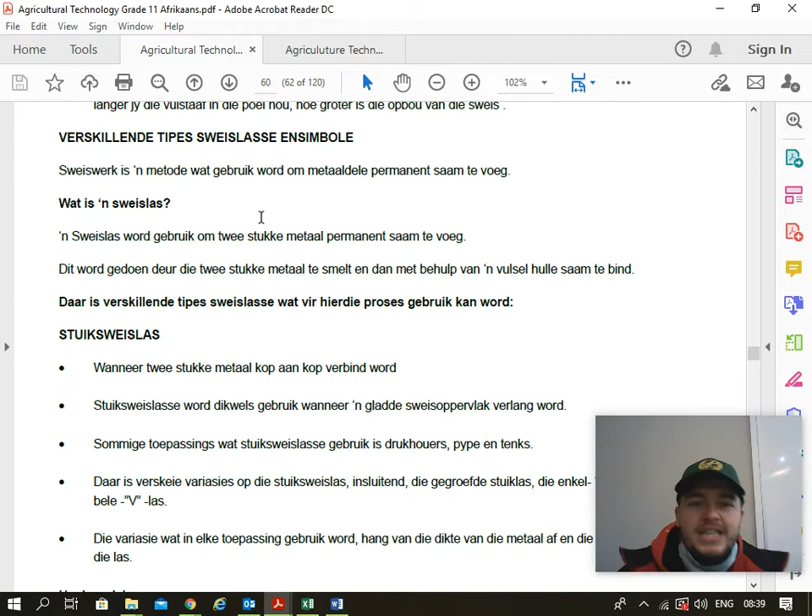You should be able to understand this by now. There are symbols for welding. If you want Pietie to weld a certain type of weld, you don't have to write it on the metal, you just draw the symbol.

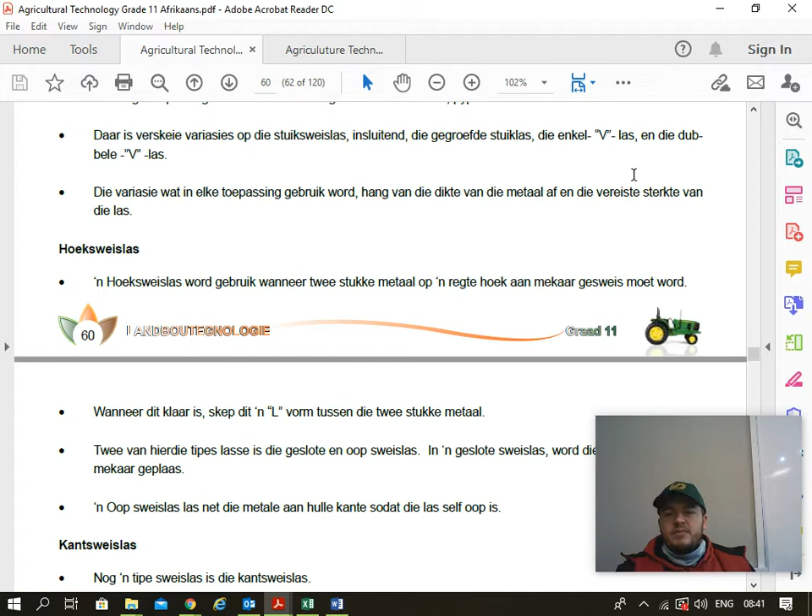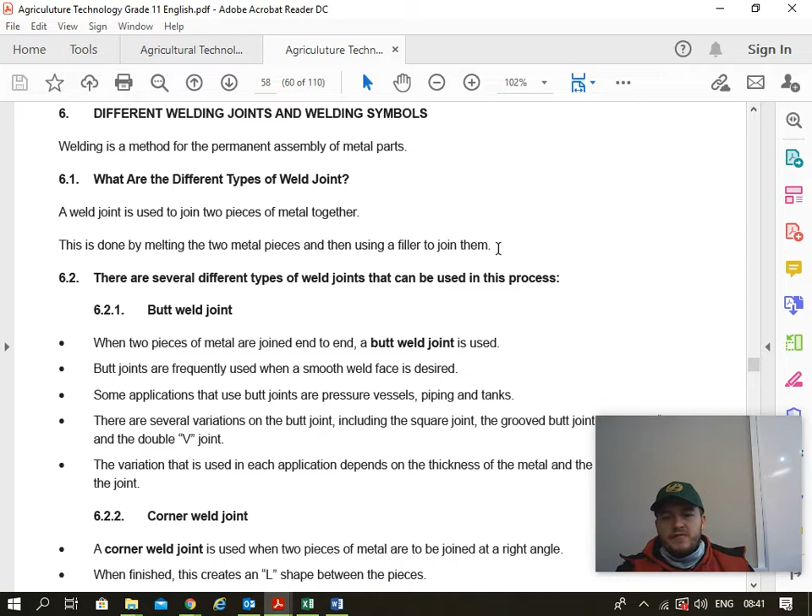Now in English, what are different types of welding joints? A weld joint is used to join 2 pieces of metal together. This is done by melting the 2 metal pieces and then using a filler to join them. There are several different types of welding joints that can be used in this process.

The butt weld joint. Oh yes.

Let's continue. When 2 pieces of metal are joined end to end, the butt weld joint is used. Butt joints are frequently used when a smooth weld face is desired. Some applications that use butt joints are pressure vessels, piping and tanks.

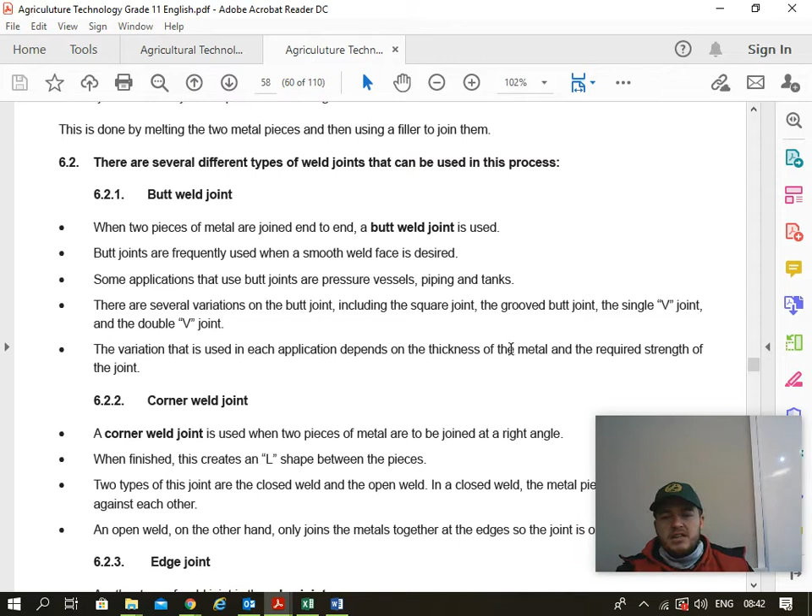There are several variations of the butt joint, including the square joint and the groove butt joint, the single V joint and the double V joint. The variation used in each application depends on the thickness of the metal and the required strength of the joint. The corner weld joint.

A corner weld joint is used when 2 pieces of metal are to be joined at a right angle. The finished creation is an L shape between the pieces. 2 types of this joint are used to weld: the open weld and the closed weld.

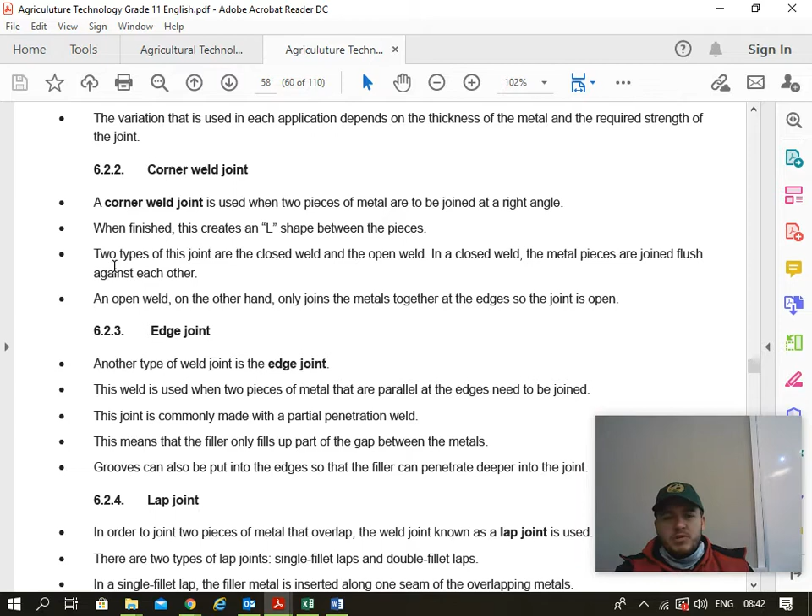In a closed weld, the metal pieces are joined flush with each other. An open weld, on the other hand, only joins the metal together at the edges, so the joint is open.

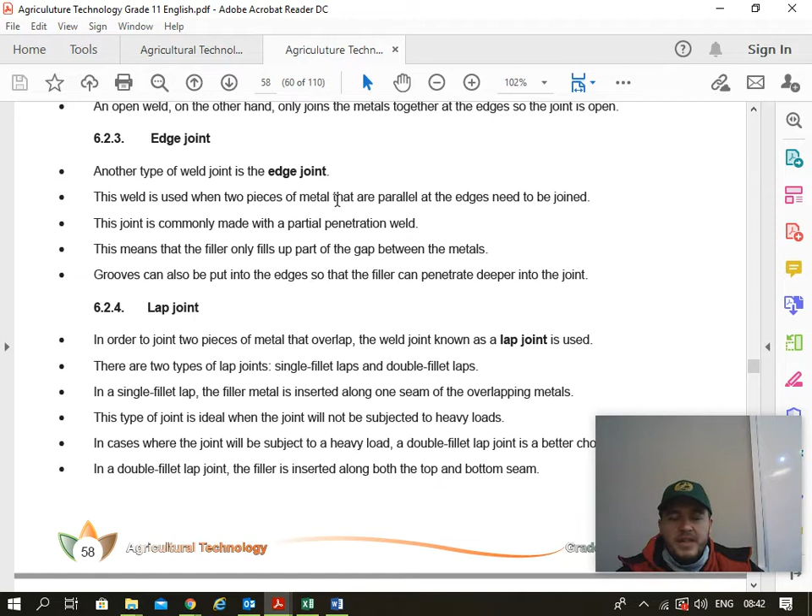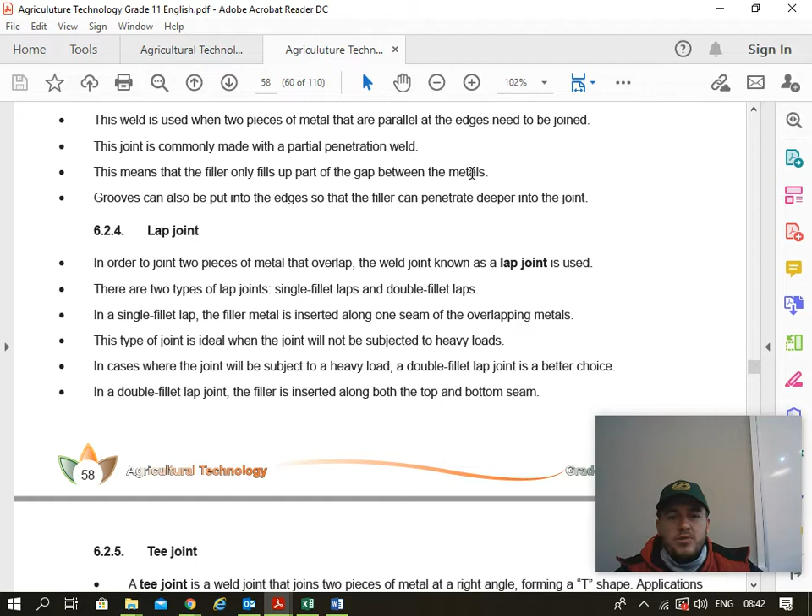And then an edge joint. Another type of weld joint is the edge joint. It is used when 2 pieces of metal that are parallel at the edges need to be joined. This joint is commonly made with a partial penetration weld, meaning the filler only fills up part of the gap between the metals. Grooves can also be put into the edges so that the filler can penetrate deeper into the joint.

Then a lap joint. In order to join 2 pieces of metal and overlap, the weld joint is known as a lap joint. There are 2 types of lap joints: single fillet laps and double fillet laps.

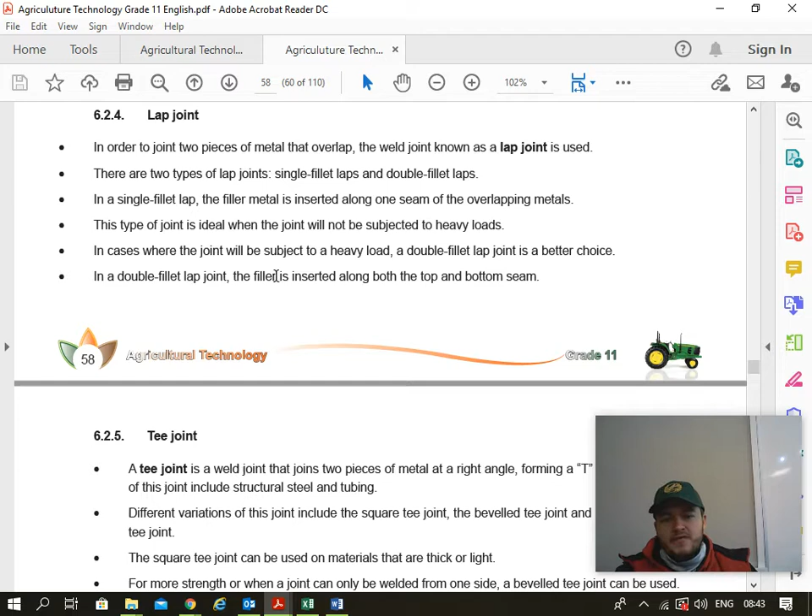In the single fillet lap, the filler metal is inserted along one seam of the overlapping metals. This type of joint is ideal when the joint will not be subjected to heavy loads. In cases where the joint is subjected to heavy loads, a double fillet lap is used. The filler is inserted along both the top and the bottom seam.

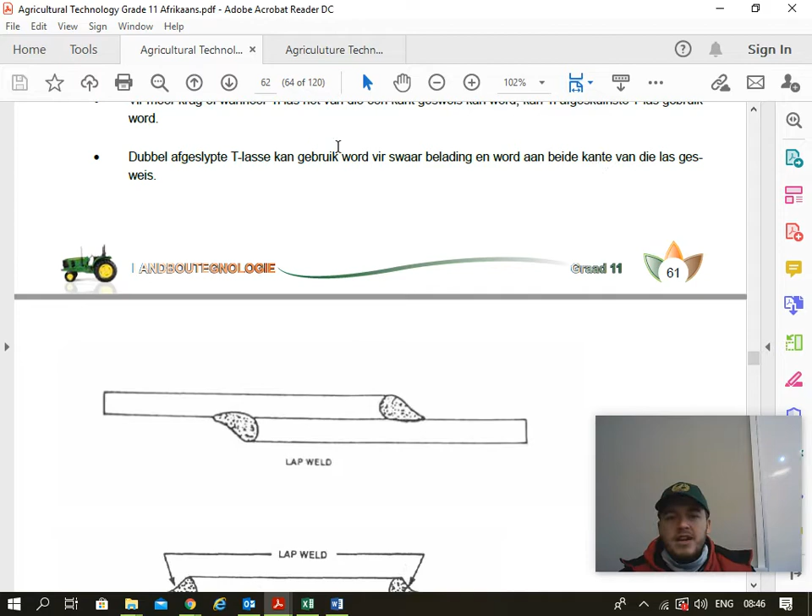For the English, the T-joint, not the T-joint when you go vat jou teen, nee, the T-joint, the letter T, the T-bone. Wen jy T-bone is 'n steel van vleis.

A T-joint is a weld joint that joins two pieces of metal at a right angle, forming a T-shape. Applications for this joint include structural steel and tubing. The different variations of the joint include the square T-joint and the bevel T-joint, and also the double bevel T-joint.

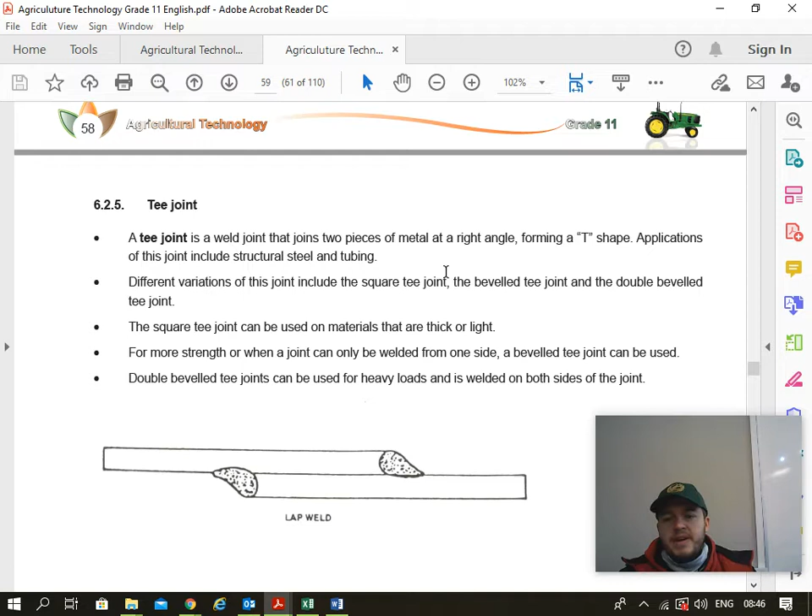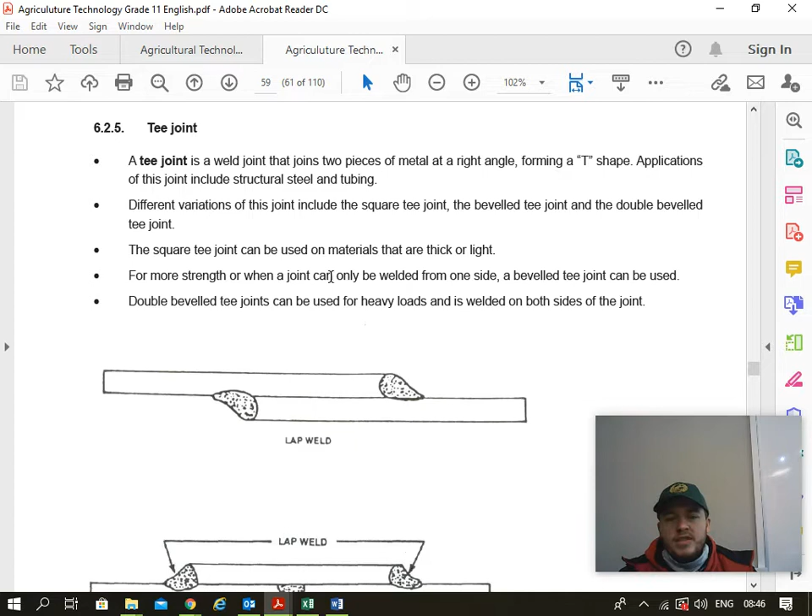The square T-joint can be used on materials that are thick or light. For more strength, or when a joint can only be welded from one side, a bevel T-joint can be used. Double bevel T-joints can be used for heavy loads and are welded both sides of the joint.

Now there's the picture. That is a lap weld. That's what it looks like. Man, that's a lap weld. That's what it gaan lyk. There we have a lap weld with a butt weld.

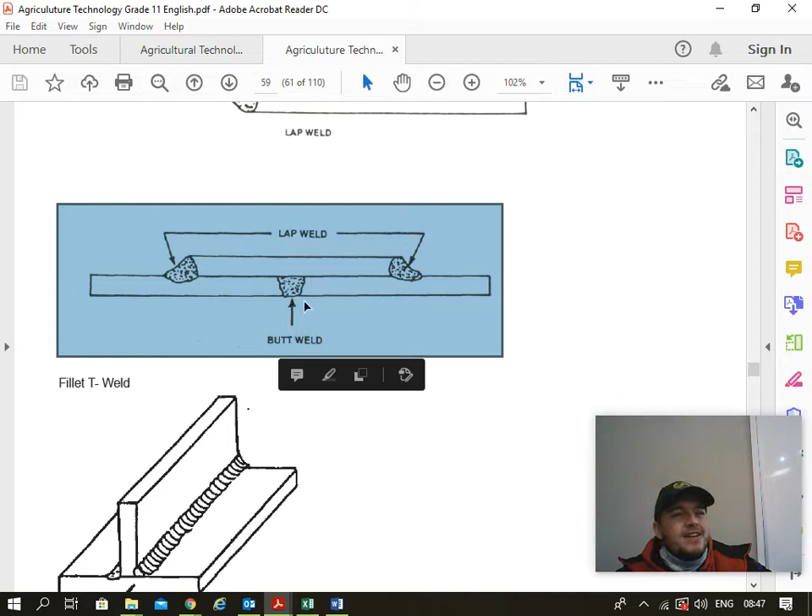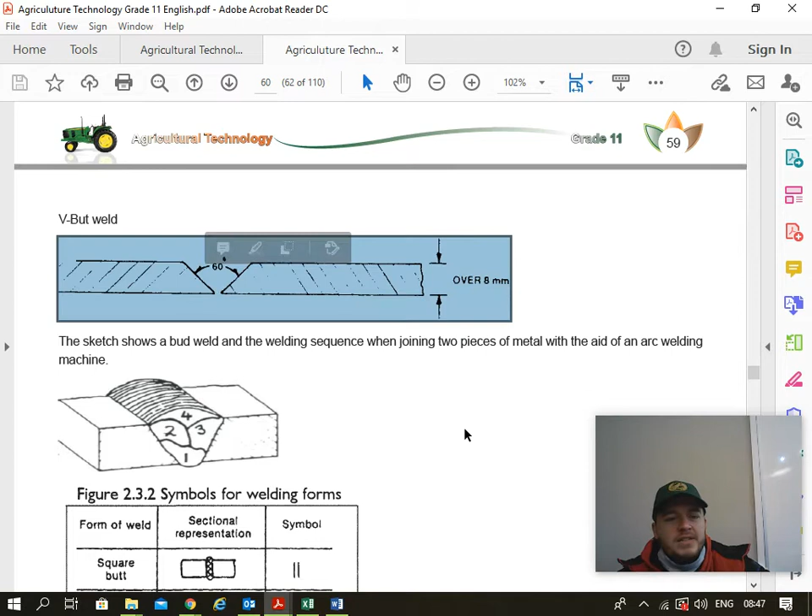That is a fillet T-weld. Daar's 'n T, is 'n fillet met 'n T-weld. En daar is die V-butt weld. Daar is hy. The sketch shows a butt weld with a welding sequence when joining two pieces of metal with the aid of an arc welding machine. So there is basically a butt weld.

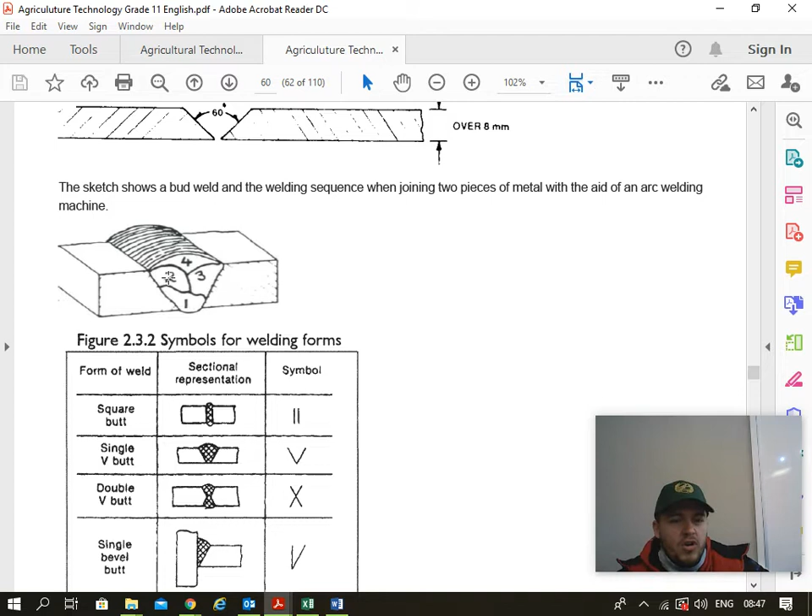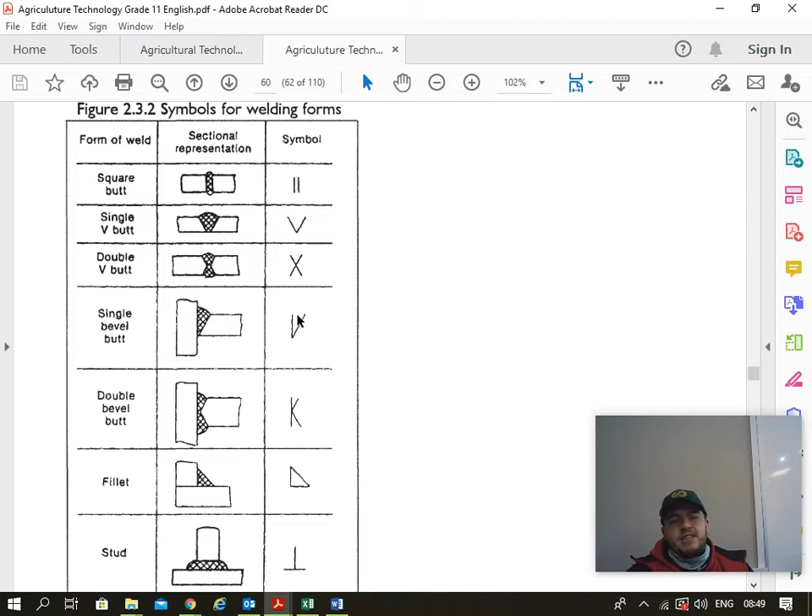We have a square butt, gewone butt joint, a single V butt, a double V, the X basis. A single bevel butt is 'n skewe V. A double bevel butt is 'n K, 'n fillet. Fillet weld, daar loop hy, is 'n driehoekie. 'n Stud, met 'n gewone T, an edge, not the wrestler but the weld. Daar is hy en 'n sealing run.

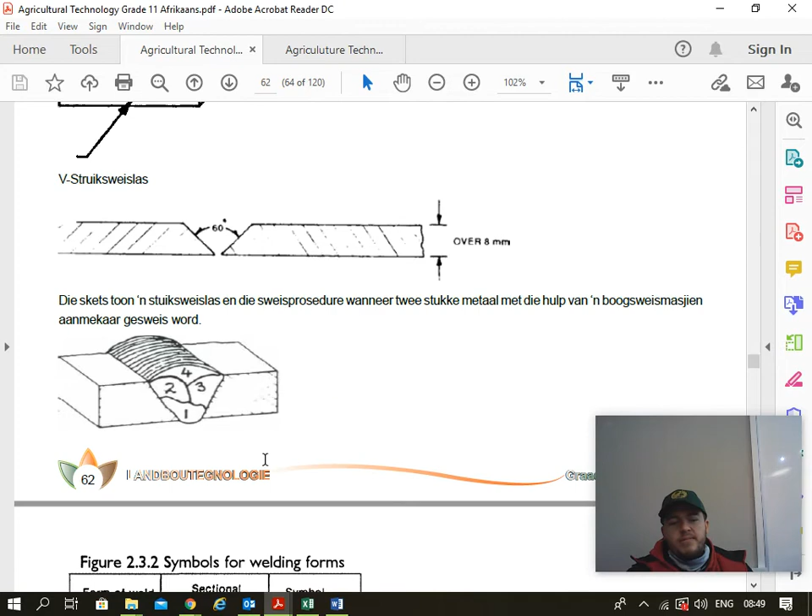En hier is nie. What I also do is I can give you that little picture there. And I can say, right boys, what's its name? What is the symbol and what is the name? Or both.

Oh, just shut up. Ek sien almal kyk nou vir Benje so. I found out today a new term, throwing shade. That's what you were doing to Benje now. You're looking at him now. Hulle gaan jou goed vat. They're gonna take your shoes and your life.

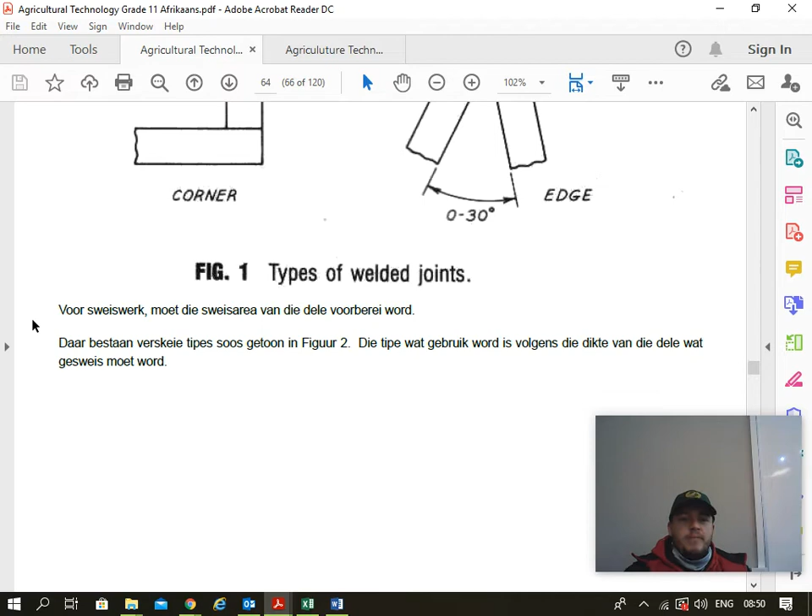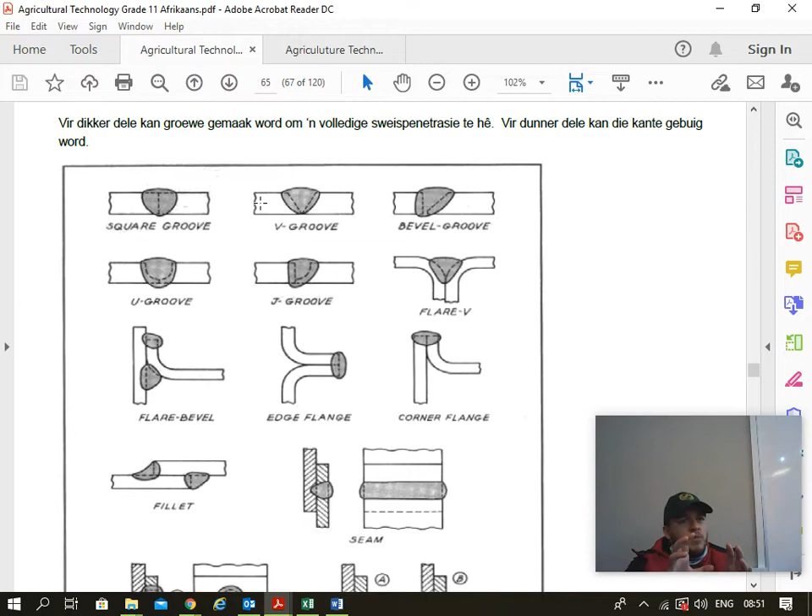So for thicker welds, we can make a groove with a grinder to make it a bit thicker, to get a thicker weld in it, to make it last a bit longer. So ons maak 'n groef om meer weld te kry, om sterker te laat weld.

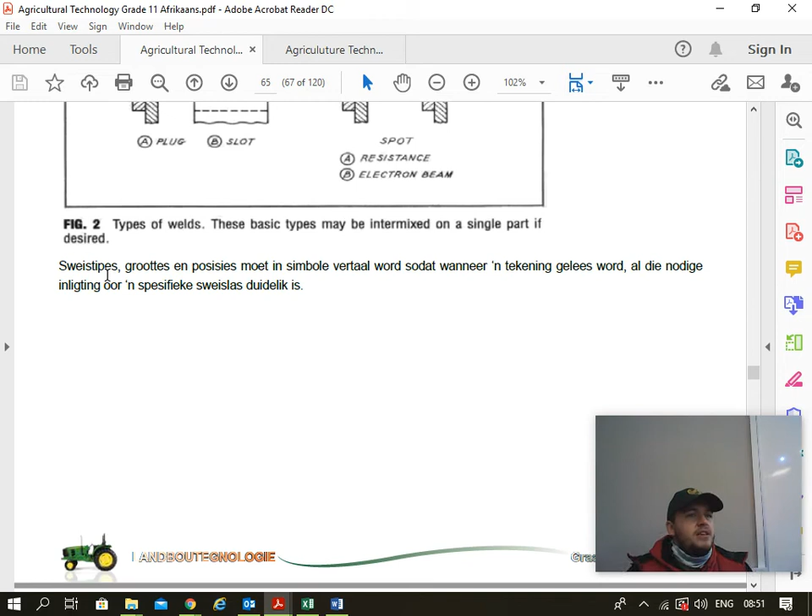So why do we use symbols? When we use drawings, my welders can see on the drawing the symbol that we're going to use. I don't want to write the whole thing on the drawing. Remember, a drawing only has length, measure, and symbols. That's it. There can't be a book.

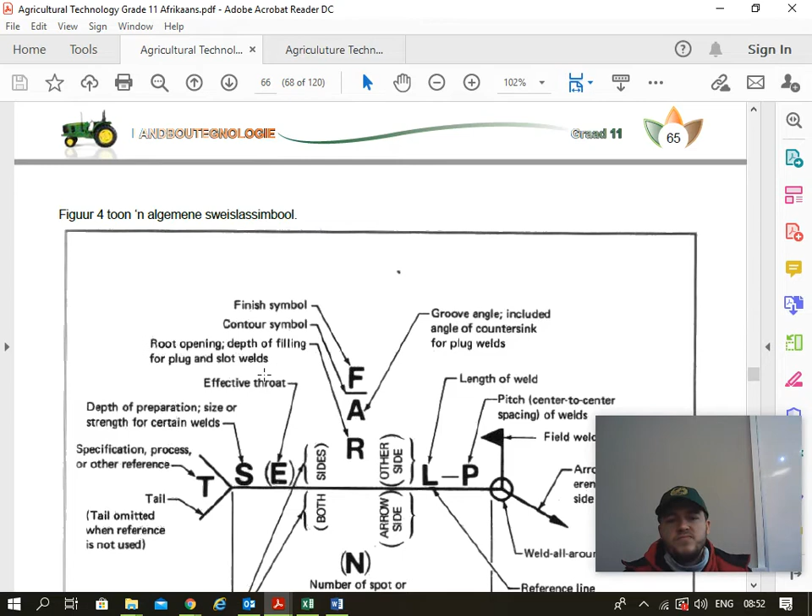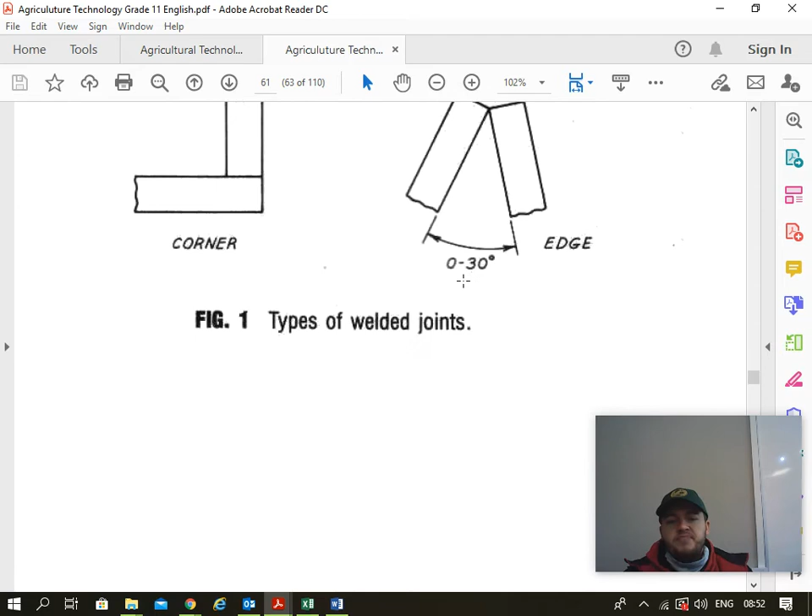Now we're going over to the English guys. Just remember, you can go through that sketch. That's important. And that one you can go through.

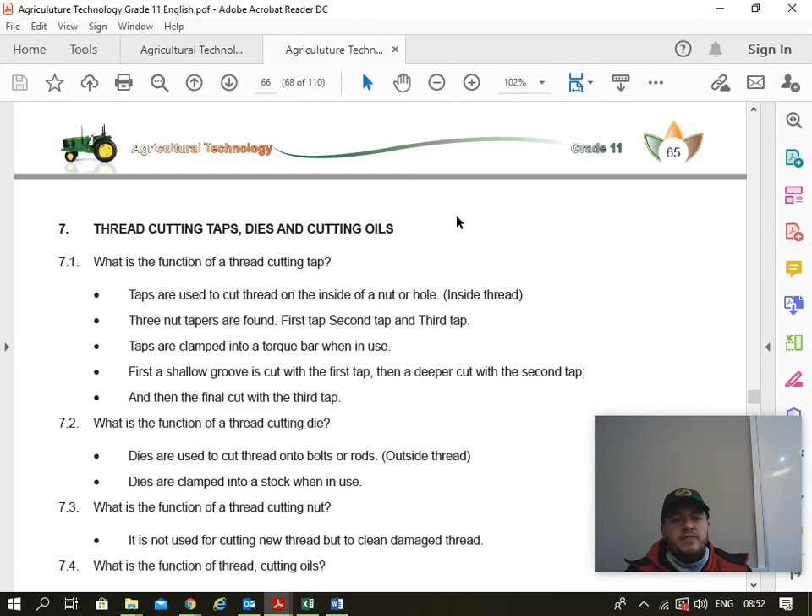Now we're going to thread cutting taps, dies and cutting oils. All of you thinking like thread, not the thread that you're wearing, cutting a thread.

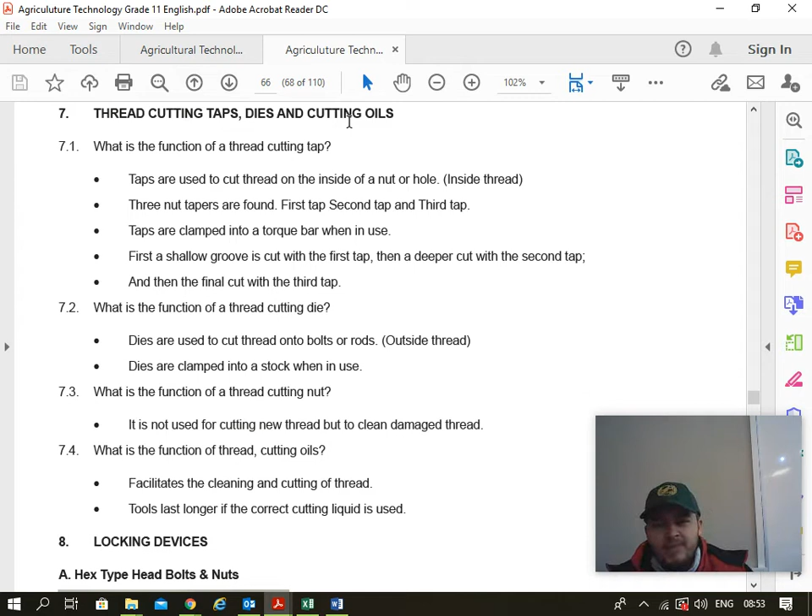And dies. Not dyes. Or dies. Ja.

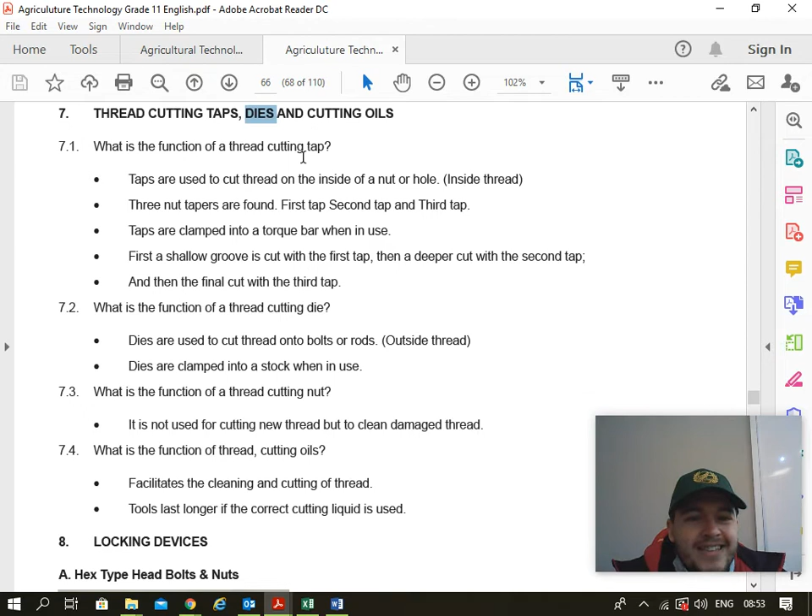What is the function of a thread cutting tap? Okay. Taps are used to cut thread on the inside of a nut or hole. It's called an inside thread. Three nut taps are found: first tap, second tap, and third tap.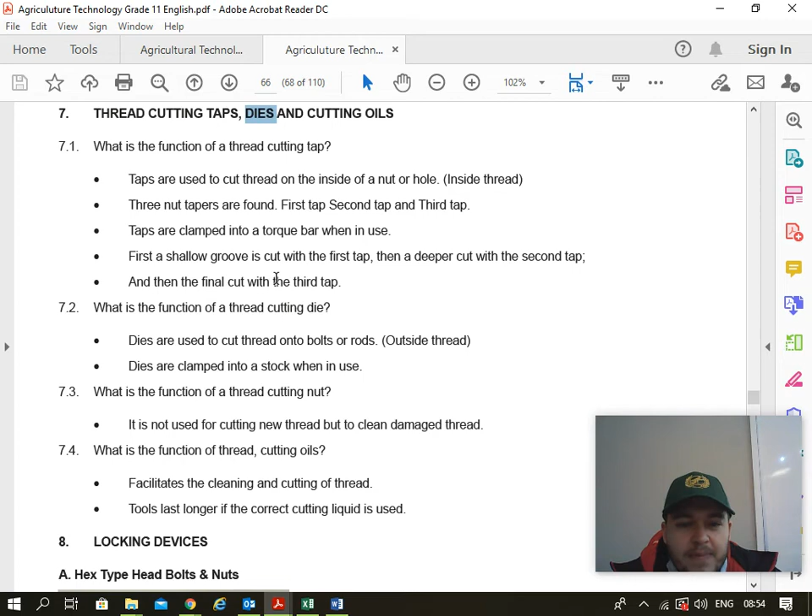Taps are clamped in a tap wrench when in use. First, a shallow groove is cut with the first tap, then a deeper cut with the second tap, and then a final cut with the third tap. Now let's see in Afrikaans.

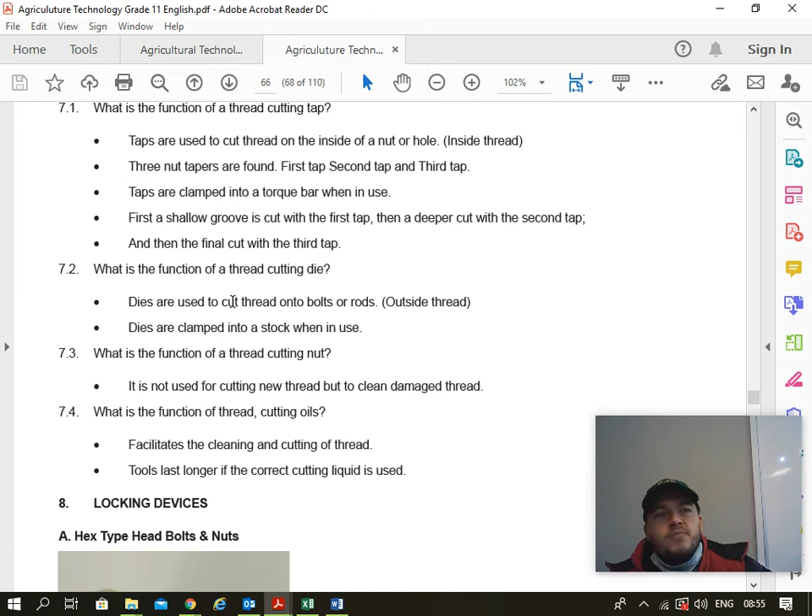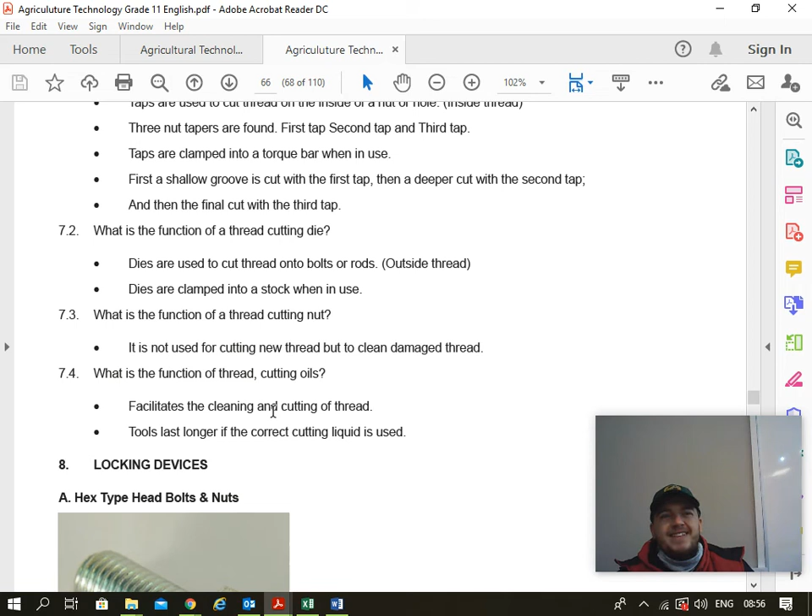What is the function of thread cutting oils? It facilitates the cleaning and cutting of thread. Tools last longer if the correct cutting liquid is used.